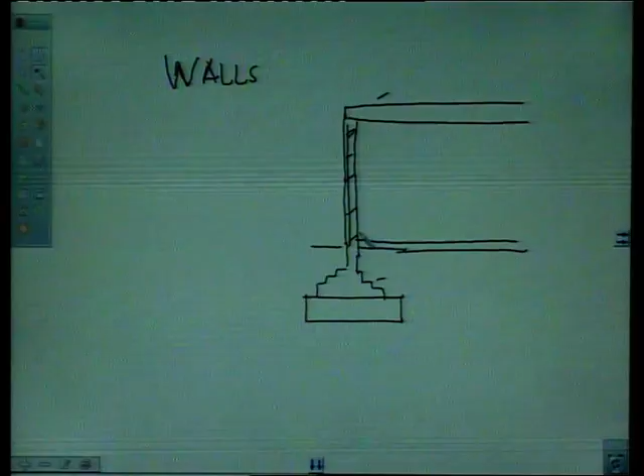So structures which take up loads and transmit load to the foundation also divide the floor area. For example, if I am having a building, it is walls which divide the whole area into rooms, so a number of rooms are created by walls.

Then purpose of wall. Number one, it marks the boundary of a building. Not only does it mark the boundary of a building, it also marks the boundary of certain important countries, like the Great Wall of China.

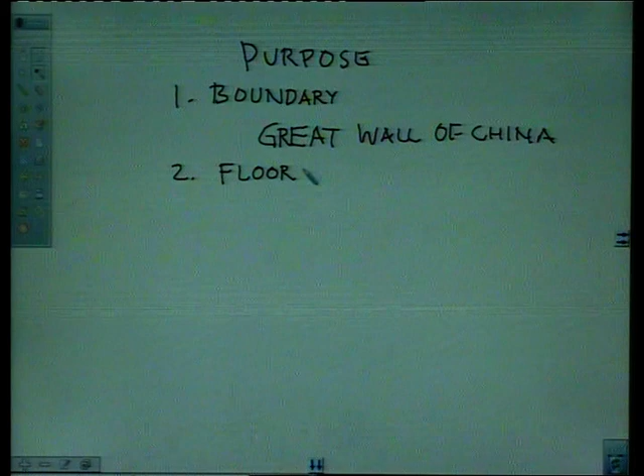Then, support for floors and roofs. As already told, the floor and roof are supported by my walls. Third, divide floor area into rooms, so we are dividing the plan of a building into rooms.

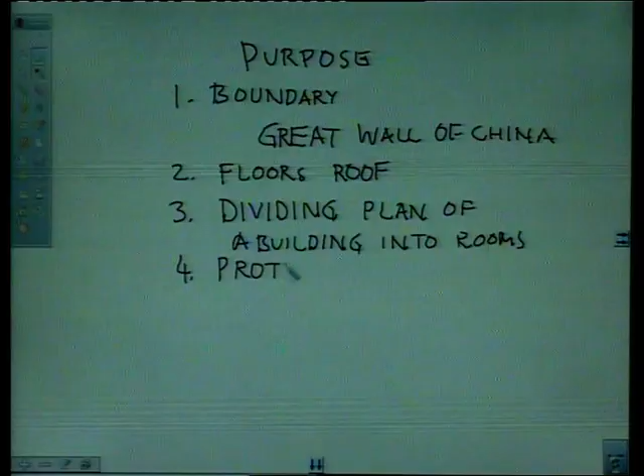Number 4, it protects from natural calamities, like earthquakes etc. But sometimes when walls are not strong enough, they are dangerous. For example, in Bhuj, no binding material was between the stones, so buildings collapsed and a number of casualties occurred.

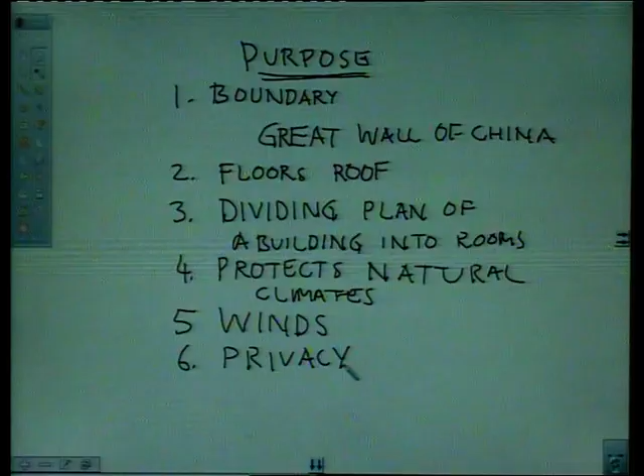It also protects from natural calamities like strong winds, so we are safe. Also, privacy of the room is maintained. So if there is a wall, there is always privacy. So, this is the purpose of a wall.

Then we have the classification of walls. This is better understood by taking a plan into view. Let us make a plan of a building. The outer wall should be load bearing.

So this is one classification of wall, and these load bearing walls take up load. The outer ones, these thick ones having more thickness, these are my walls taking up loads. Here some doors are provided, and here I have some partition wall, which is not taking up load.

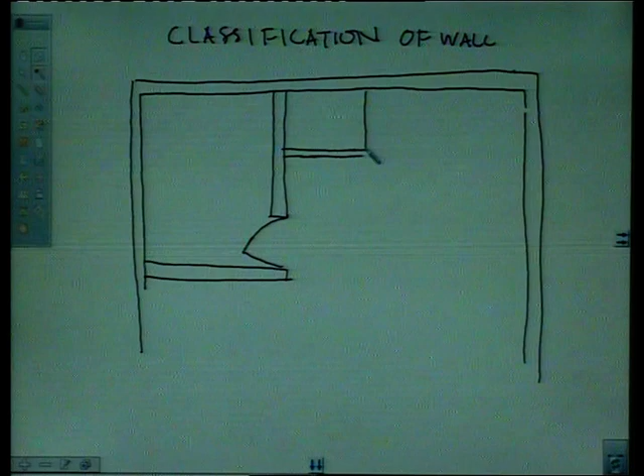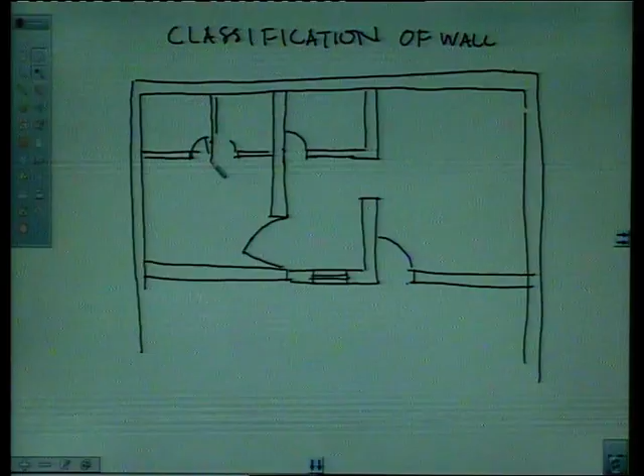So you can have some windows also, some window sections, and of course there should be a door, so that there is access, and one door should be here. And this is my veranda. So these are my partition walls, which are non load bearing walls.

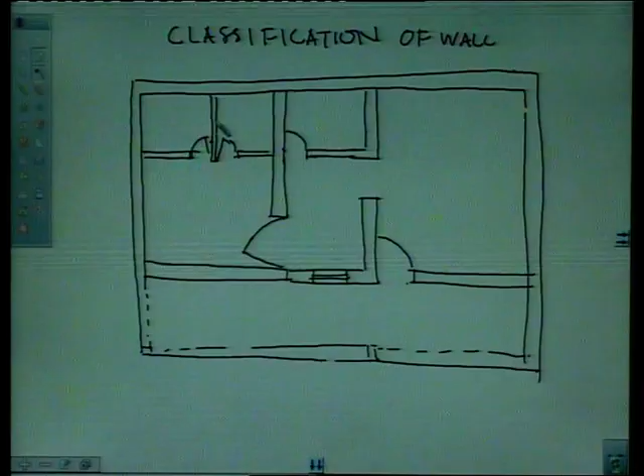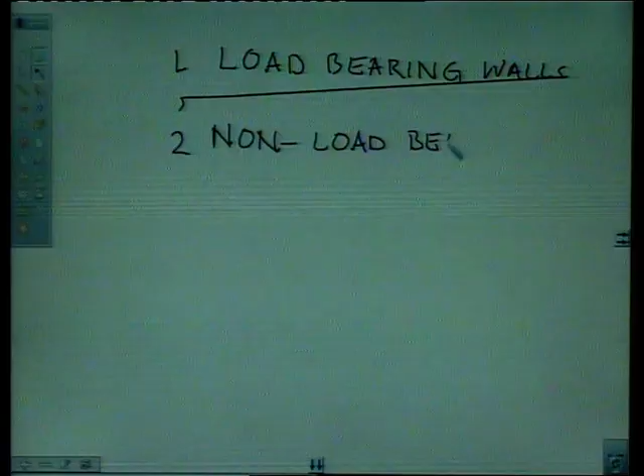So classification number 1 is load bearing walls, which can take up load. Then second is non load bearing walls, which are partition walls, not taking up load.

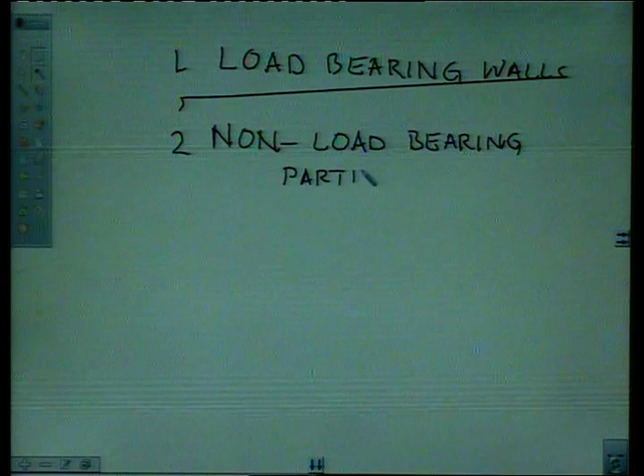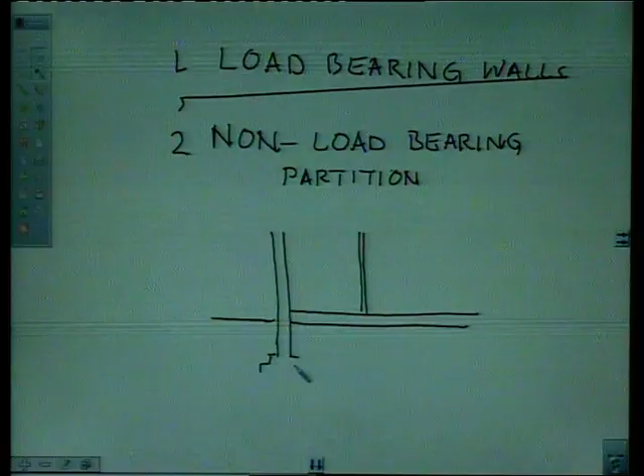This can be shown with a sketch to show how load bearing and non load bearing walls are there. If you are having a small wall here without foundation, and here is another wall which is having a foundation - walls which have a foundation are load bearing because they are transmitting some load of the structure: roof load, live load, dead load, wind load etc. So this way we can have two classifications.

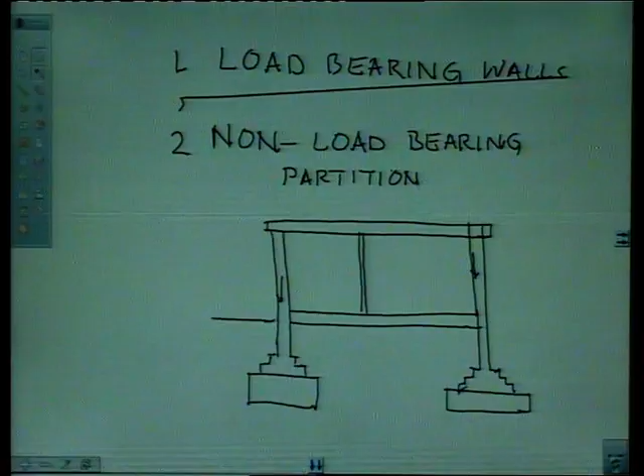Then we have brick masonry wall: a load bearing or non load bearing wall constructed of brick material. So here we are using bricks as the unit of making the wall.

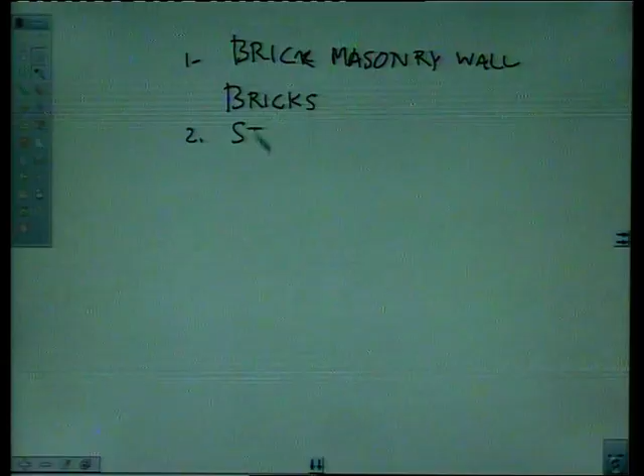Bricks are used, then we have stone masonry wall. Here we are using stones for making our wall, stones of good quality. If stones of low quality are taken, then the strength of the wall will be less.

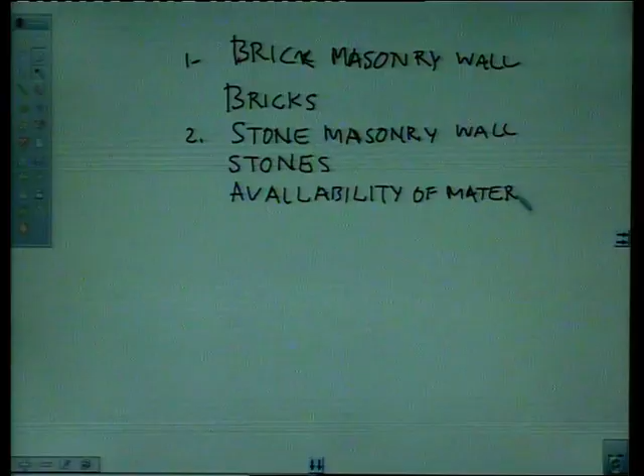Now, for stone, you cannot consider stone in the plain area because it is costly. The availability of material is also considered. So in hilly areas, stones are easily available, so in hilly areas you are using this type of stone masonry wall.

Then we have reinforced brick masonry wall. In this wall, along with bricks, you are using steel also. Bricks are used, and reinforcement is also used.

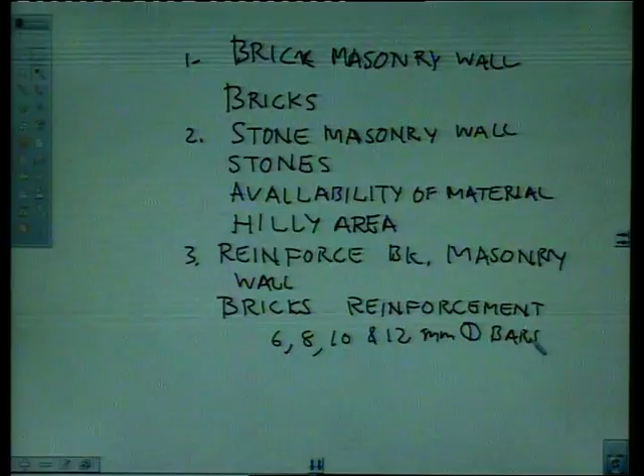In reinforcement, we are having 6, 8, 10 and 12 mm dia bars. Or wire mesh is also used, in order to avoid cracks in the plaster.

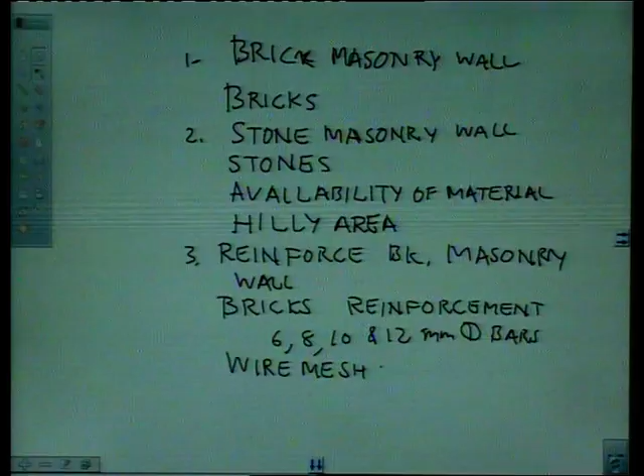Then we are having advantages. Number 1, cheap in comparison to RCC wall, so we are having cheap costing. Simple construction, and construction is rapid, so you can quickly do the work.

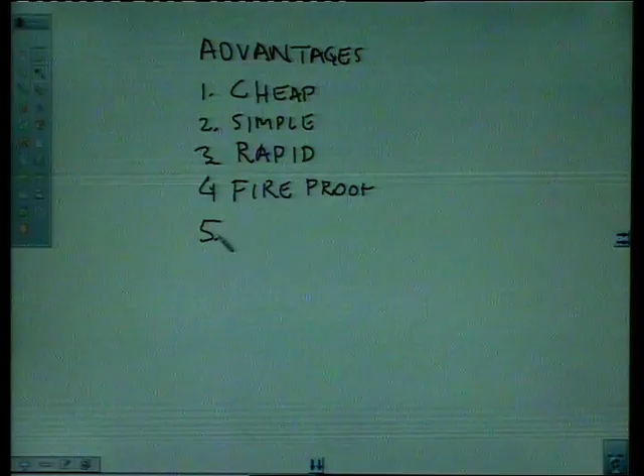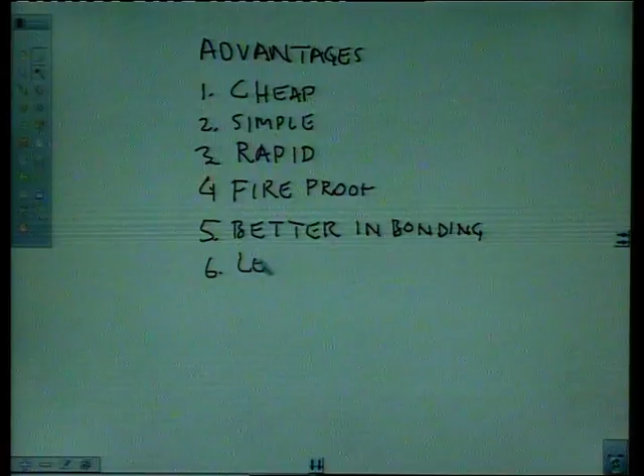Then fireproof, so it can take up heat. Fifth is better in bonding, less shuttering, so less concrete is there.

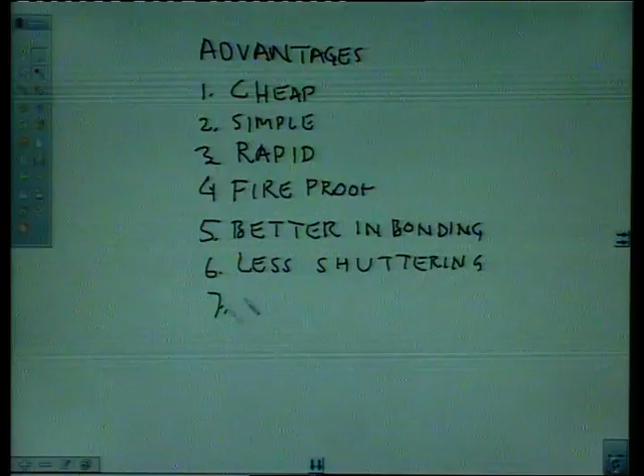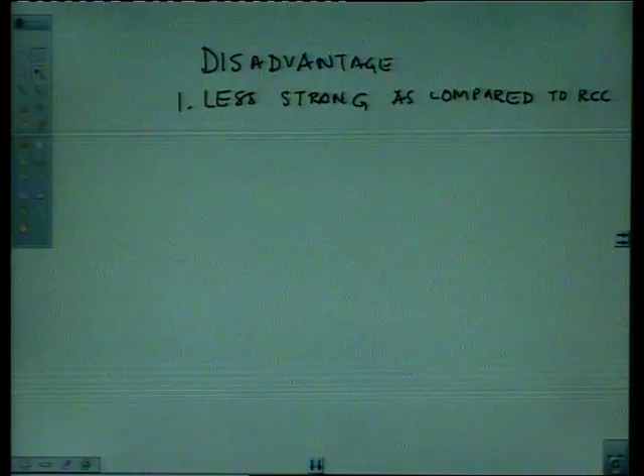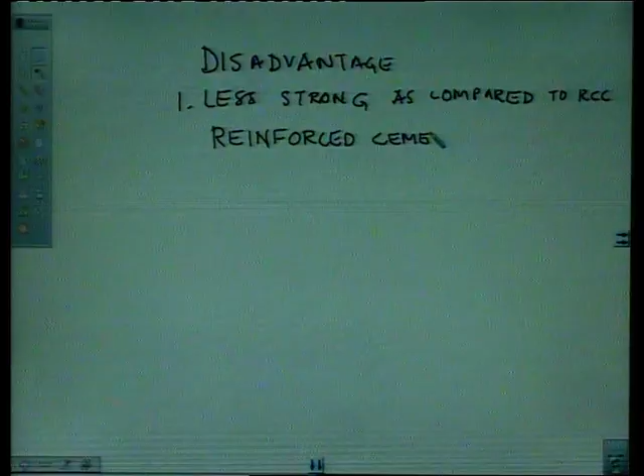Then we are having disadvantages. It is less strong as compared to RCC. RCC means reinforced cement concrete, so we are using concrete with reinforcements.

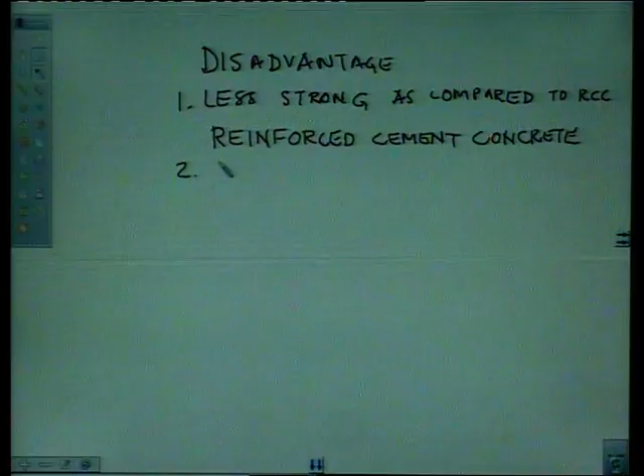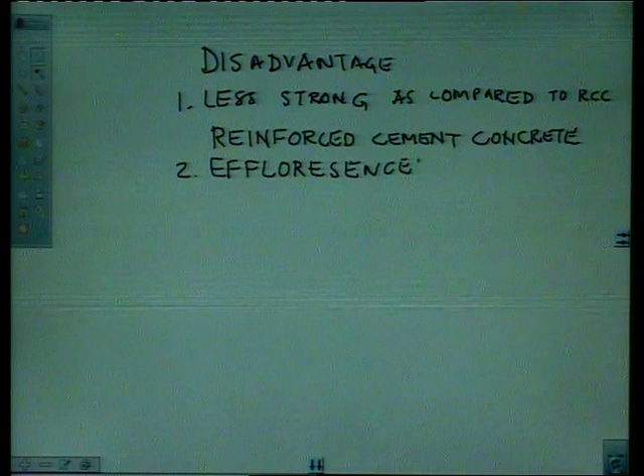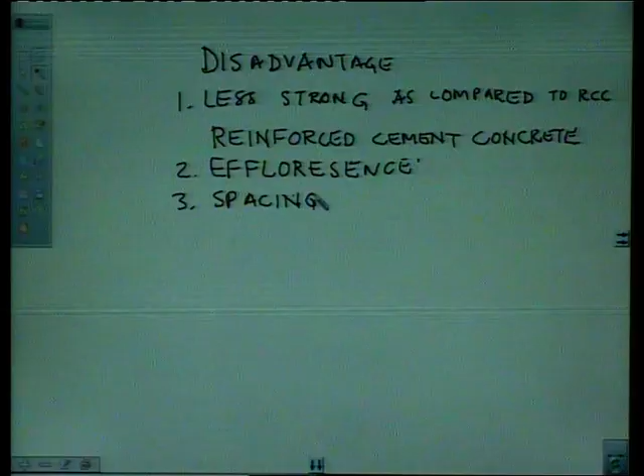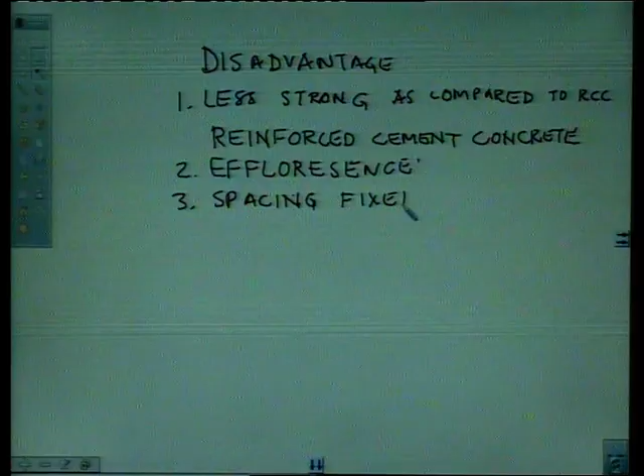Efflorescence causes corrosion, so efflorescence is another disadvantage. Spacing of bars is fixed, since thickness of brick is standard, so spacing is also fixed. Its life is short; the moment efflorescence comes, maintenance cost of such walls increases.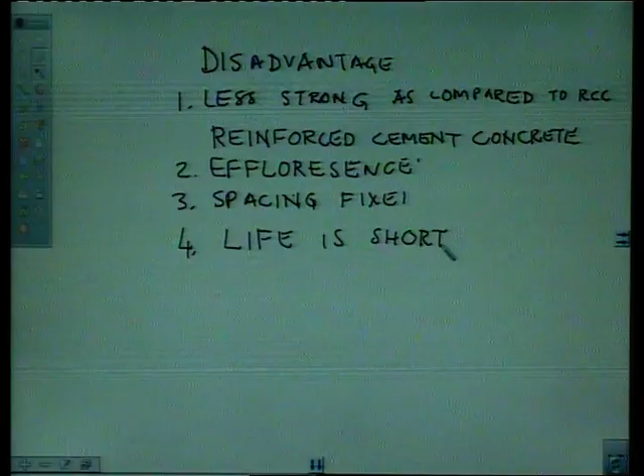Reinforced concrete partition wall. Here material is mainly concrete and reinforcement. We are having precast members, so these are concrete precast members.

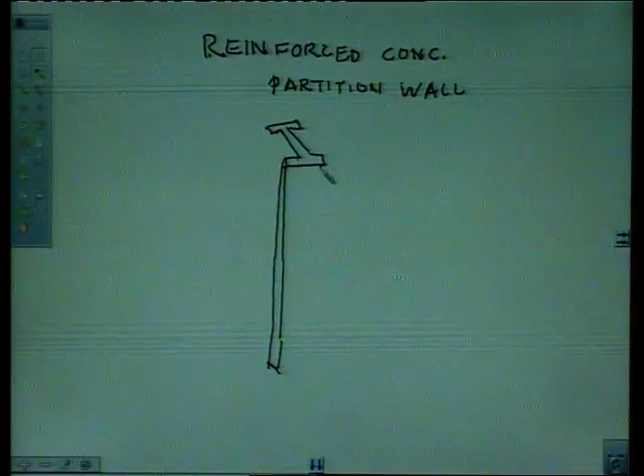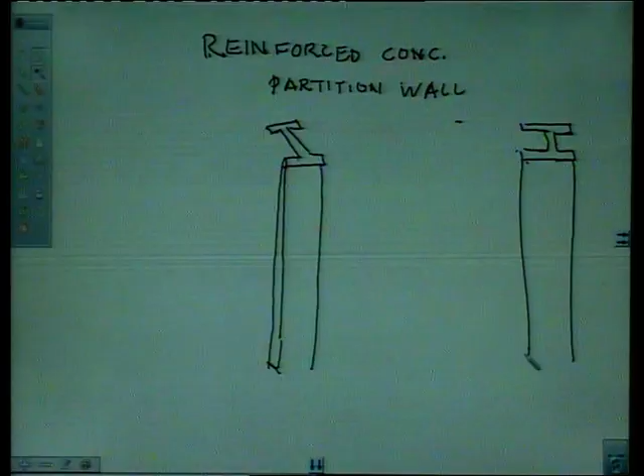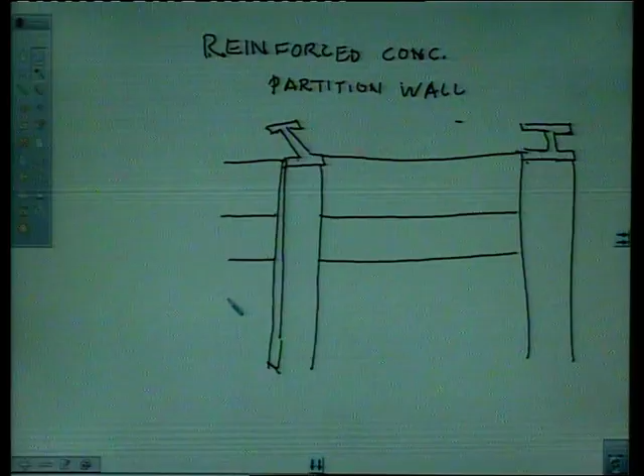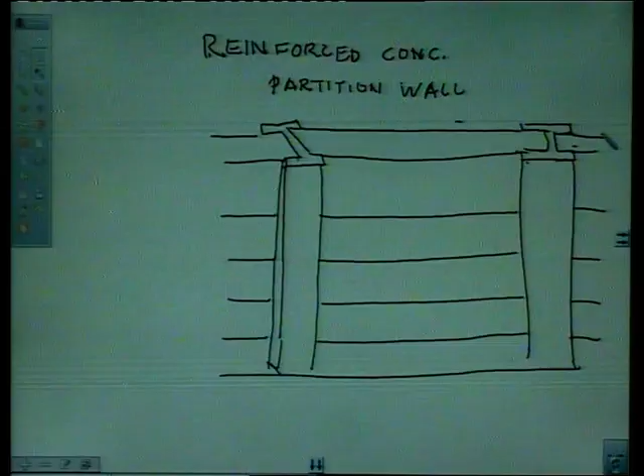So in this we are having some RCC planks over here, which can be used as a partition. RCC can be used in this wall.

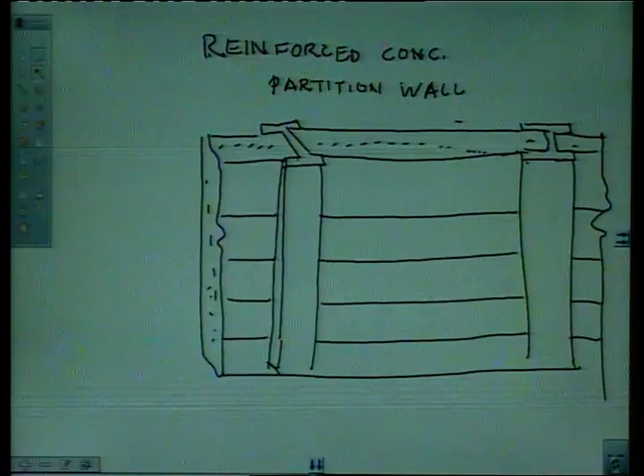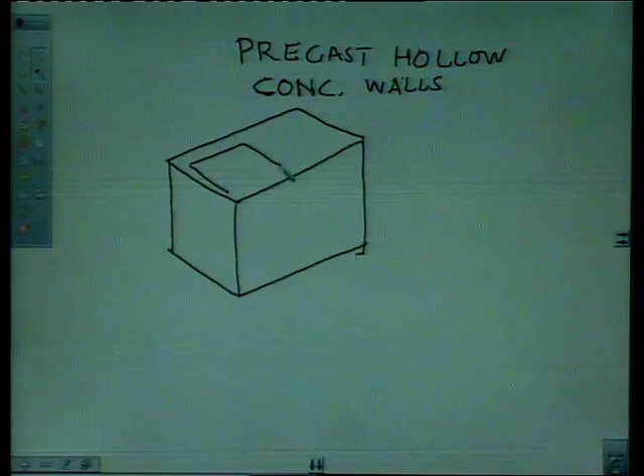Then we are having another one, precast hollow concrete block walls. In this case, we are using hollow concrete blocks and it is like this one. The area is hollow, and there are machines which can make these blocks quickly.

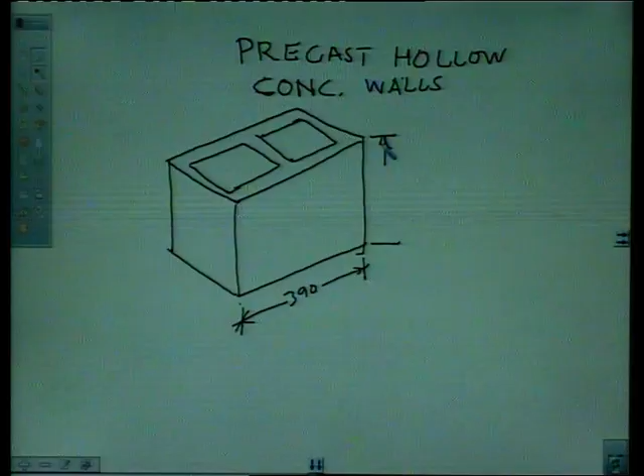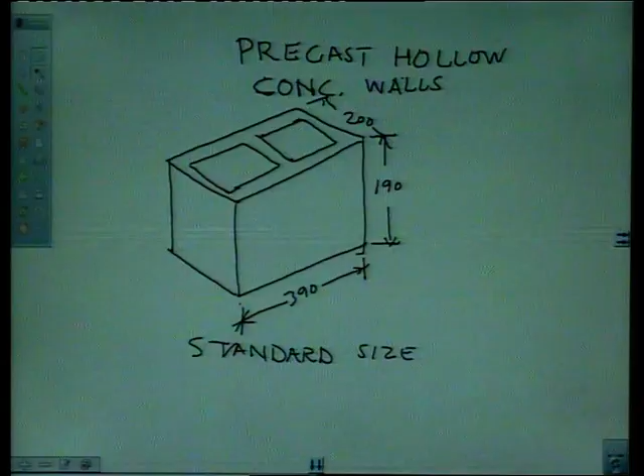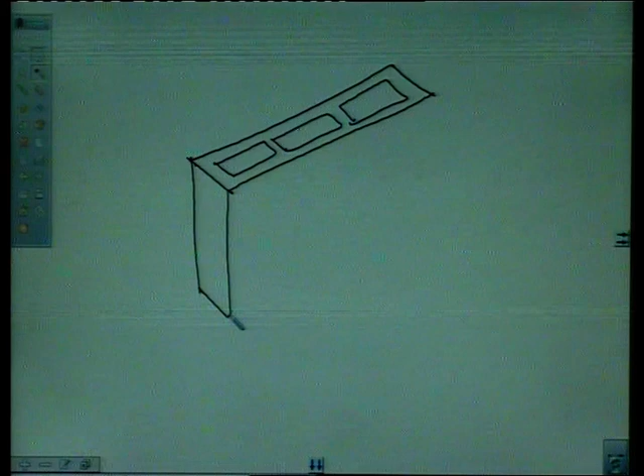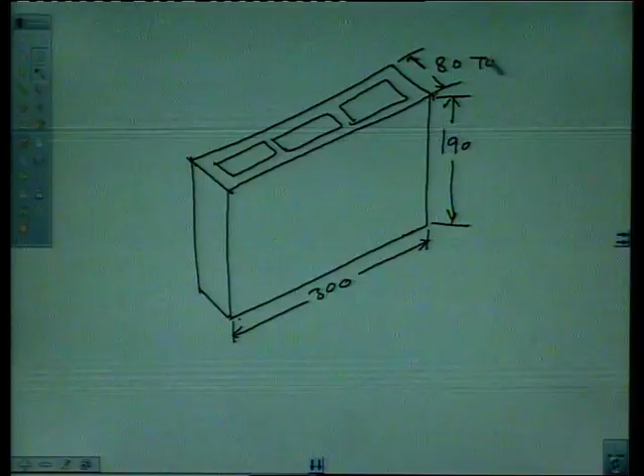As the size is bigger than our normal bricks, construction is fast over here. So this is our standard size, 390 mm. Then for partition wall, there is another section: 300, 190, and 80 to 100 mm. So these are for partition.

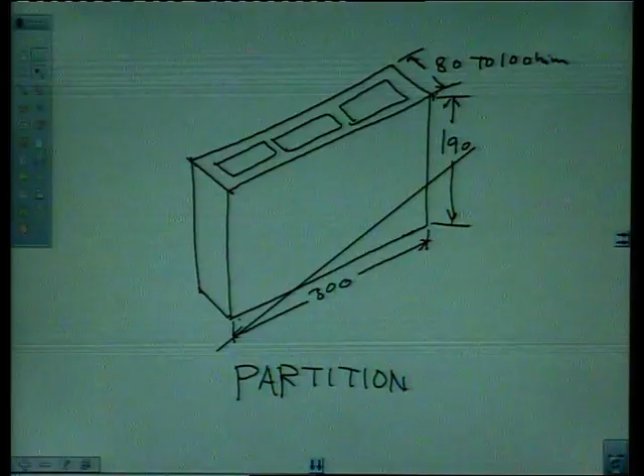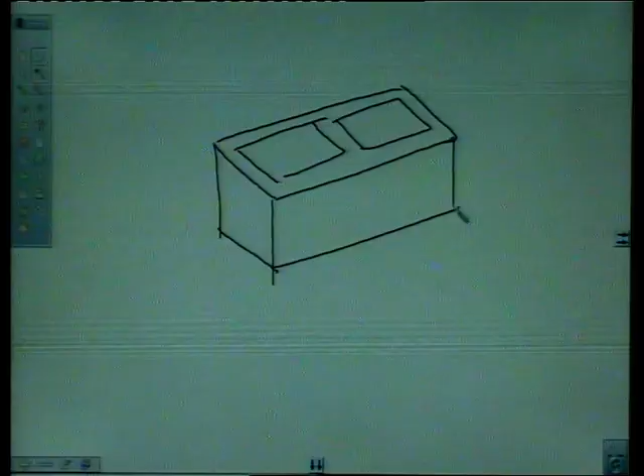Then we are having building tiles. This is same as standard one, only the dimensions are varying. These are building tiles, hollow building tiles.

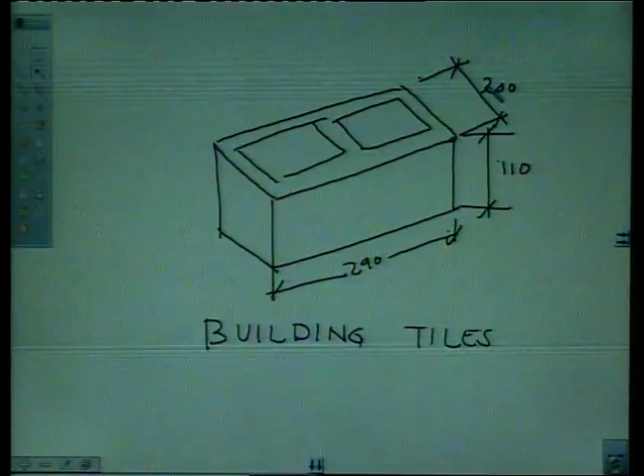So these walls are stronger than ordinary brick or stone walls. Advantages of such walls: number one, saving material. You can see the section is bigger, so the construction is very fast and you are using lesser block.

Second is economical. Third is mortar saved, since the surface is very regular, mortar is not wasted here. Then durable, so such constructions are very durable. Work is speedy, so work is not slow; progress is the main one.

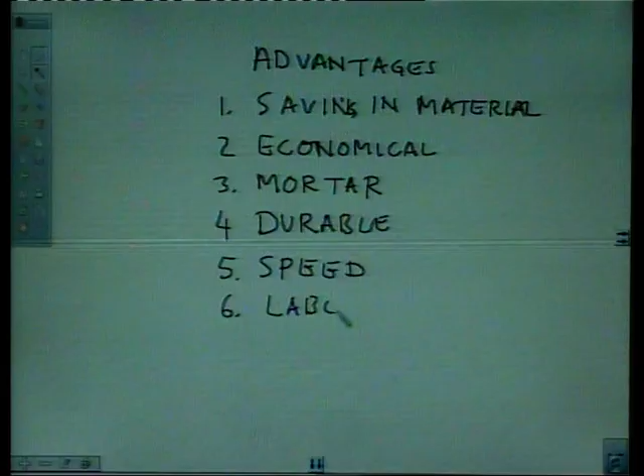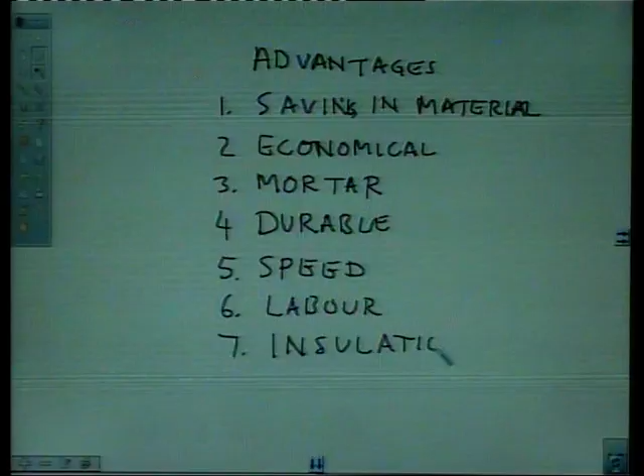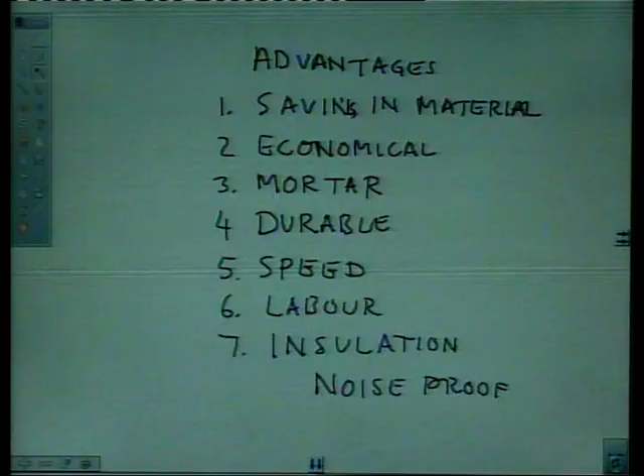Less skilled labor required, so that is easily done. Number 7 is insulation, that is important: heat insulation, cold, damp, and it makes the building noise proof also. So such constructions are very helpful. Then we are having composite masonry wall.

Composite masonry wall. Composite means you are having two materials, one is stone and another is brick. So both are used simultaneously, making the appearance of the wall very nice.

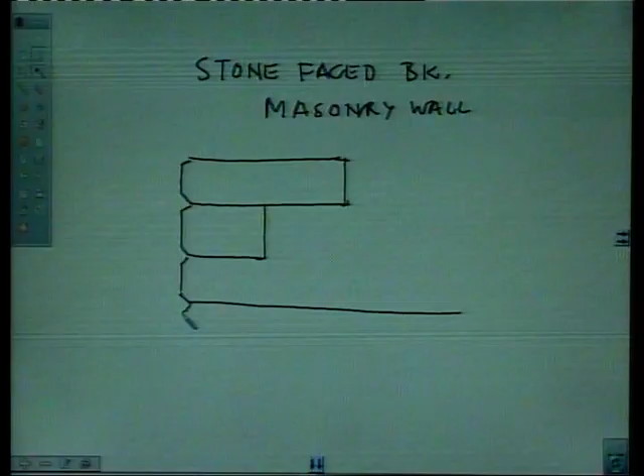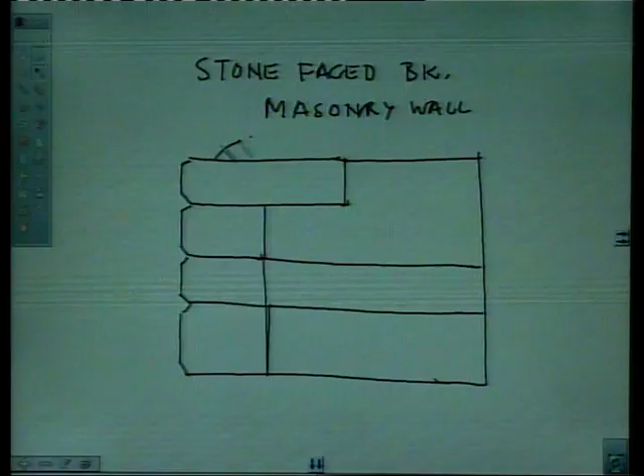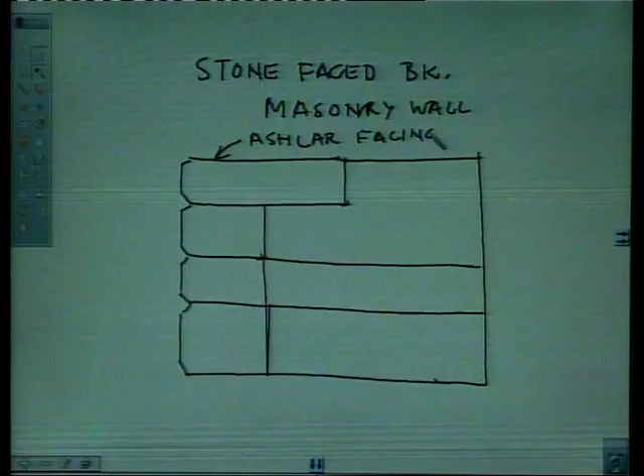So here is stone faced brick masonry wall. Stone facing, ashlar facing is there, which is finely dressed. So this is my ashlar facing, ashlar stone facing. This makes the building look very beautiful.

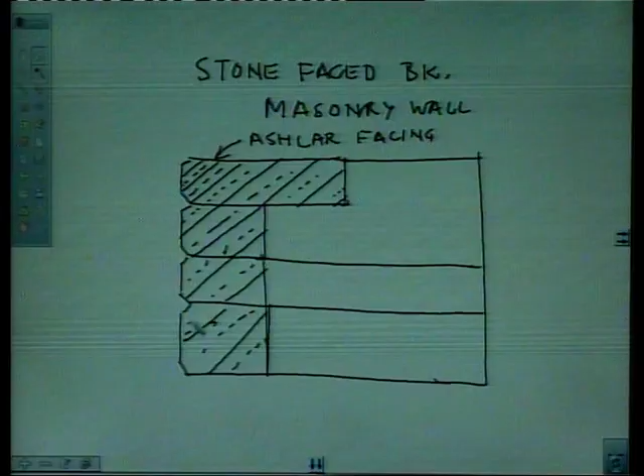And back side is having bricks, a number of bricks, since stone is having more height than bricks. So this way bricks are placed on the back side. So this is one composite masonry.

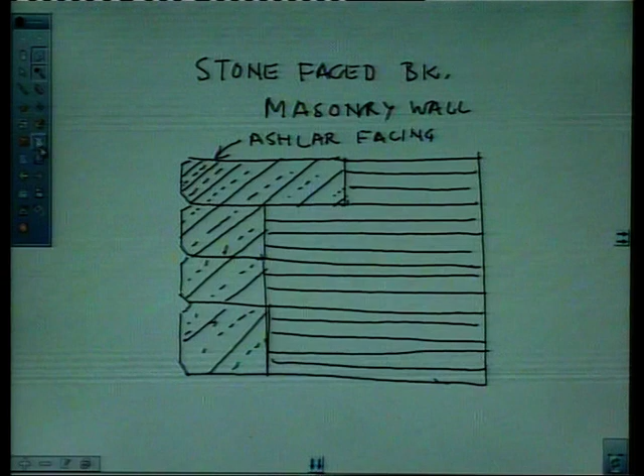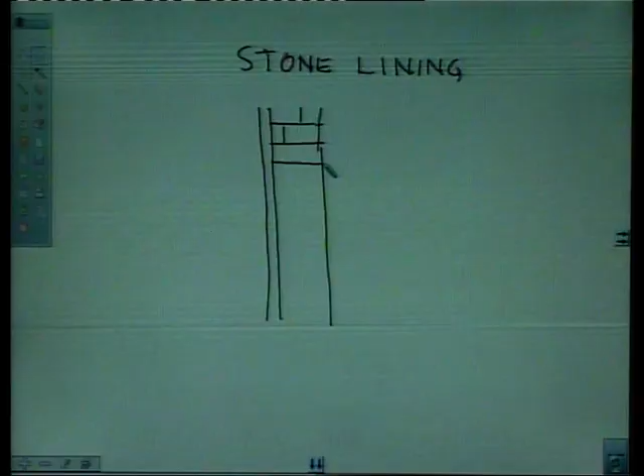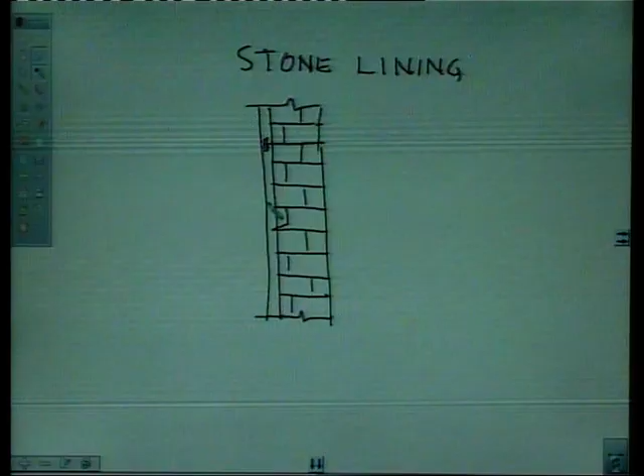Then we are having stone lining. Here face is stone, then bricks are on the back side. Here is a dowel placed over here, and a connecting cramp is there at some distances. After 3 courses we are having such type of arrangement, cramp.